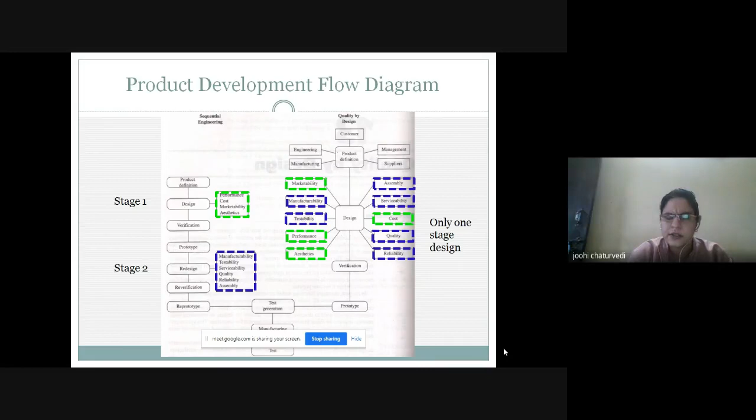If we look at a hypothetical product development timeline, quality by design saves time, because it does not devote any time to redesigning, re-verification, and re-prototyping, since all stakeholders are involved in designing at one go and ensure their requirements are fulfilled. So there's a complete mix of requirement fulfillment during quality by design, because cross-functional teams are there, and it saves time.

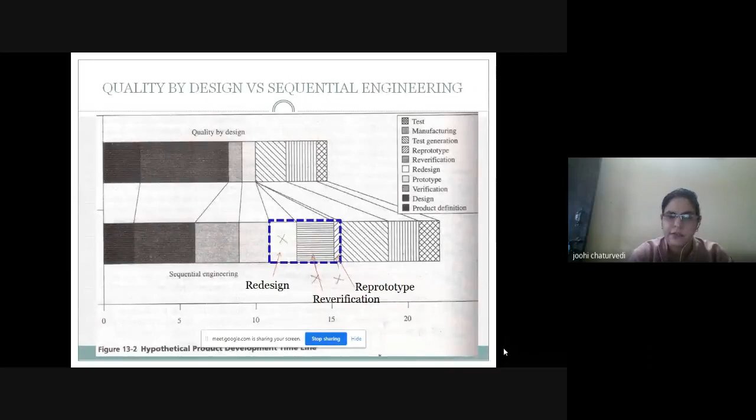The communication models are also different in sequential engineering versus quality by design. In sequential engineering, the production engineering and business team, the purchasing team, finance team, or purchasing quality, do not interact within themselves. But in quality by design, because it is a team effort, everyone interacts with each other as well as with the organization management.

Communication is very important, and everyone knows what kind of requirements the other department has, and they also show concern towards the requirements of other departments. But in sequential engineering, one person is more or less focused on his or her own work, and they are not that much involved in the work of other departments.

Now, if we talk about the tools used in quality by design, these are the various tools, and we are already aware of most of them, like total quality management philosophies. There were lectures also conducted on the same, on computer networks, local area networks, and global information networks for passing information from one place to another.

Then ISO 9000 9001 series, then the 14000 series of environmental management standards, then total productive maintenance. There are various types of maintenance, like preventive maintenance, which is time-based maintenance. Then reliability centered maintenance is also a modern concept, where the reliability of each and every part is considered and given importance.

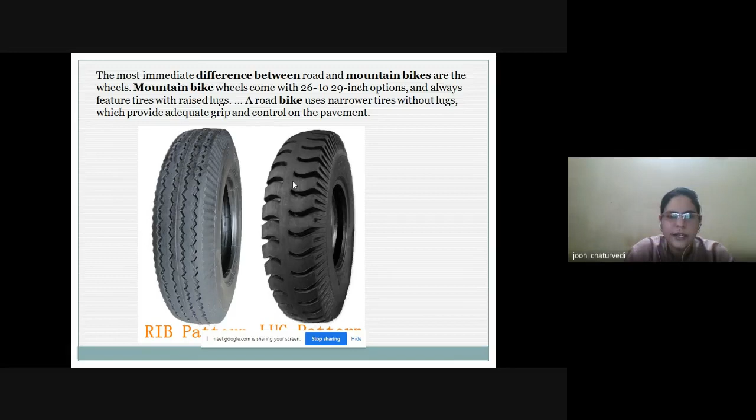Moving further towards the first step, listing the customer requirements. Here the primary requirements are that the performance and the aesthetics play a very important role with respect to the handlebar stem, and the aesthetics, the looks.

So deriving the secondary requirements from the primary requirements: reasonable cost, the aerodynamic look of the handlebar stem. It should have a nice finish. It should be corrosion resistant, and performance wise, it should have lightweight. It should have strength also, and durability also.

And in some cases, tertiary requirements can also be listed further. Primary requirements are not actionable by the engineering staff, so secondary requirements are listed in order to have more clarity.

Moving further, based on these primary requirements, the selection of material and the manufacturing process will be done. Selection of material and manufacturing process is important because if we select a poor material or process, then the component or product can stop functioning, or it may perform below the level of performance it is supposed to give. The component or product does not function properly or perform within required specification limits.

For example, in cars, if the specified mileage is 10 to 15 kilometers per liter, and it gives a lesser mileage, then that is a reduced performance as compared to what is promised with the customer.

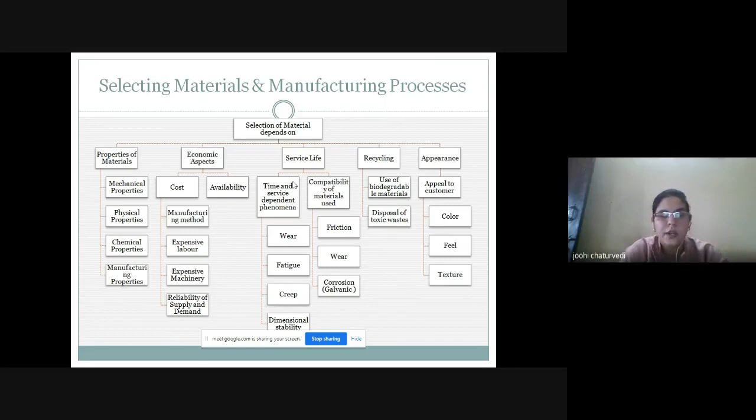Then friction, whether the parts are actually working well with friction, is important - for example, in tires, friction is a very important factor while designing the tire. The wear of the tire, the corrosion on reacting with various chemicals or with the environment, whether it is getting corroded or not - all these play a very important role in selecting the material.

Sequence-wise, mechanical properties should be considered first, then physical properties, then chemical properties, and fourth is the manufacturing properties.

Mechanical properties consist of strength, the resistance to deformation; toughness, which is resistance to failure; ductility, the ability to be drawn into wires; then hardness, which relates to one material getting scratched by another. If a hard material is there, then when rubbed with a material of lesser hardness, it will never show any scratch.

Then elasticity, fatigue, and creep. Fatigue is failure at a lower force when subjected to repetitive loadings, and creep is the slow permanent small deformation which happens in a material.

High strength-to-weight and stiffness-to-weight ratio of materials is also important. Strength and stiffness is the resistance to deformation the material shows, particularly for aerospace and automotive applications - for example, aluminum, titanium, and reinforced plastics. Properties should be appropriate to the conditions under which the product is expected to function.

It is important to find out the conditions under which the product will function. For example, in Antarctica where ice is present, the temperature will be very low, so material will be selected based on that. But for any vehicle that has to be serviced in India or elsewhere in the Asian continent, the functioning conditions will be different.

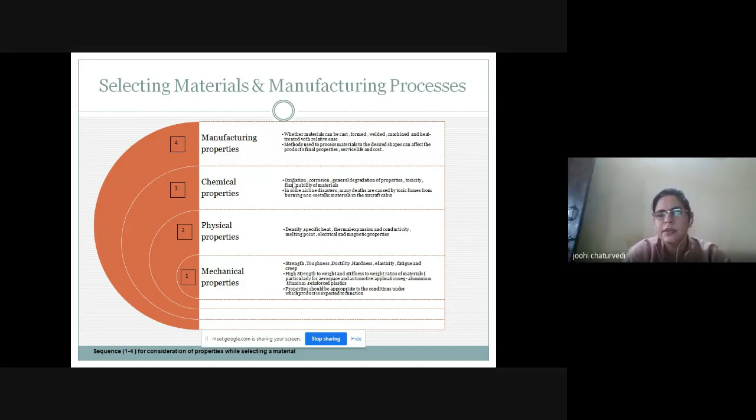Service life and cost also plays an important role in selection of materials. So the most important point here is that the sequence of properties selected should be mechanical, then physical, then chemical, and then manufacturing properties.

I hope up till now there is no problem in understanding.

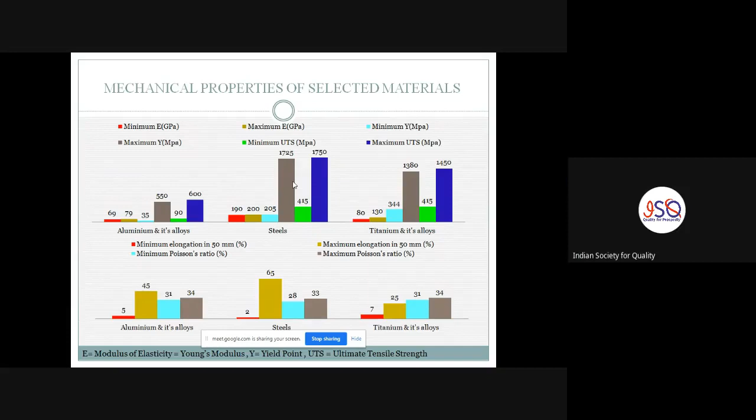Hello? Hello? Anyone has any questions? Okay, so far going good, no problem. Actually sir, we are not able to see the participants. Sometimes we feel whether they are able to hear or not, so in between it is necessary to ask.

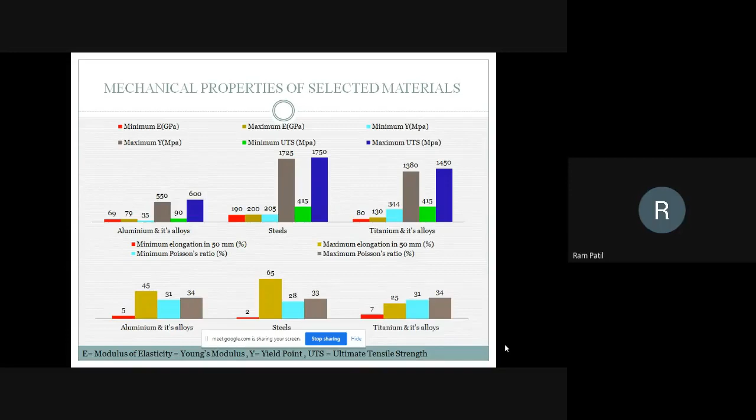Yes, so moving further, like one example, I have taken some mechanical and chemical properties, and some physical properties also. Now first we have to consider mechanical properties.

Now here, modulus of elasticity, that is Young's modulus, plays an important role. Yield point, which is denoted by Y. Modulus of elasticity is denoted by E, and UTS is ultimate tensile strength, or the strength at which the material breaks. So the tensile strength here, the minimum and the maximum, are shown for aluminum, steels, and titanium.

Minimum for titanium is 415 megapascal, and 1450 is the highest ultimate tensile strength. Then steels, the range is 415 to 1750, so steel is having the maximum range. Aluminum actually has a lower ultimate tensile strength, from 90 to 600.

So according to the robustness which we want to have, we can select the material. If we want to have a material having greater strength or greater tensile strength, then steels can be used, and moderate tensile strength, then titanium can be used, and lower tensile strength, then aluminum can be used.

So for the cycles or handlebars which are produced for kids, maybe aluminum may be used because it does not require that much strength. The weight of the kids is also very low.

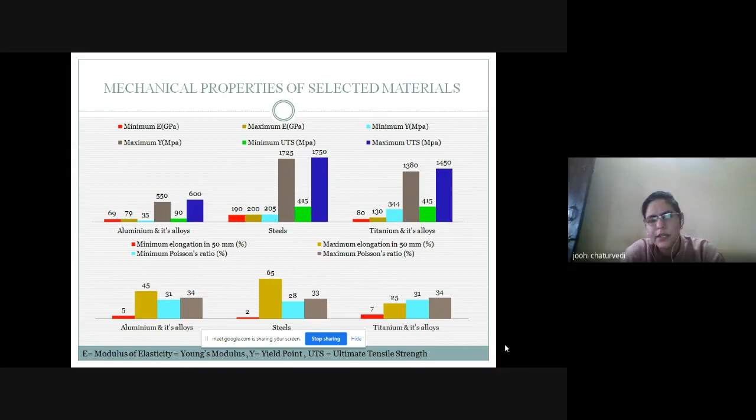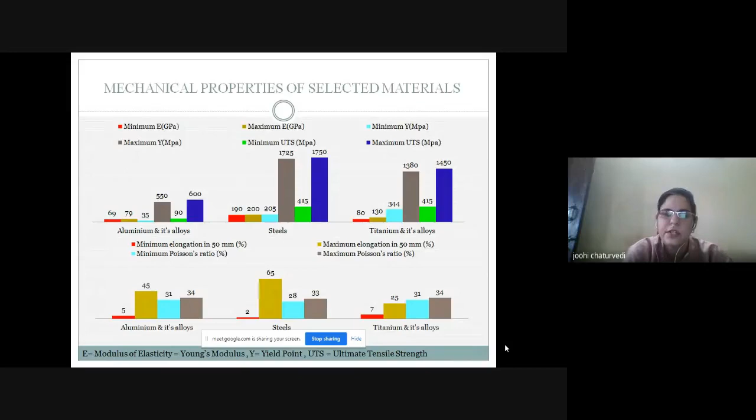Similarly, Poisson's ratio is basically the ratio of the length, the depth and the thickness of the material. Minimum Poisson ratio is 31 for aluminum, and maximum it is 34. Similarly, steels also show it as 28 and 33, and titanium 31 and 34. So all these properties can be considered for designing the materials.

Then physical properties can also be considered, like the density. The material density also plays an important role in the manufacturing process which is selected. A denser powder material actually helps in powder metallurgy, when powder metallurgy processes are performed.

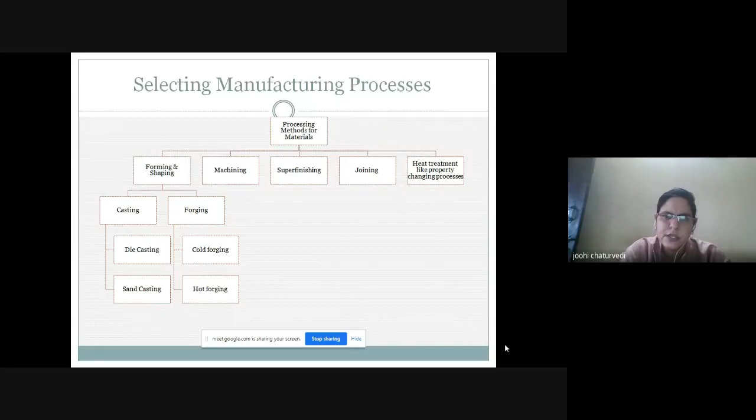So what are the important aspects of these? Powder metallurgy is for complex parts made of high strength and hard alloys. Casting is the oldest method, used for producing complicated shapes, and it is much cheaper as compared to powder metallurgy or forging.

Plastic deformation takes place when compressive forces are applied in case of forging, where the material is subjected to compressive forces and is deformed to the desired shape. Parts belonging to the net shape manufacturing category can be made with special techniques using forging, and with powder metallurgy, good dimensional accuracy, good surface finish, and strength can be obtained.

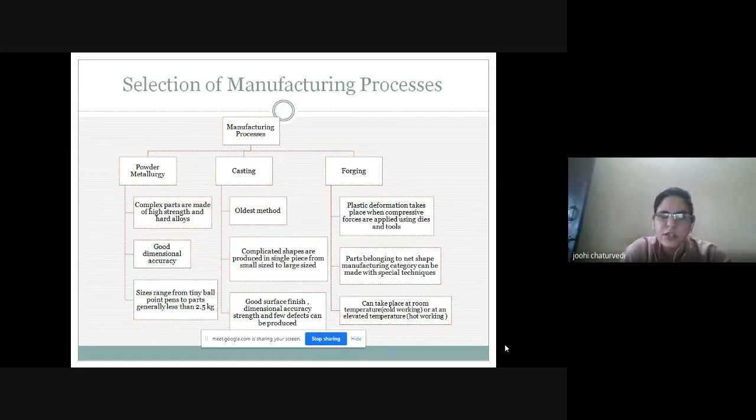But there are some defect possibilities also in case of casting. So all these 3 processes can be compared for their benefits and for the type of materials they can manufacture.

So here these relationships are emphasized. Steel is having a relationship with reasonable cost. Aluminum is also having a strong relationship with reasonable cost. And welding is the process which is a reasonable cost joining process.

Other joining processes are not given here; maybe other processes directly produce the net shape manufacturing products which do not need any further joining or other process. Also, aerodynamic look is best supported by die casting, followed by sand casting and forging, and powder metallurgy also supports aerodynamic look.

Then for nice finish, it is aluminum and titanium which give a nice finish, and die casting also supports this finish, as does powder metallurgy. Aluminum and titanium are better corrosion resistant as compared to steel.

For lightweight, aluminum and titanium have a lighter weight and have a strong relationship with that requirement. For strength, steel and titanium are able to deliver strength well, and forging also supports the strength obtained in the final component.

For durability, steel is most durable, and die casted products are more durable, as are forged products. Medium relationships are shown by the circle which is not filled, and the triangle shows a weak relationship.

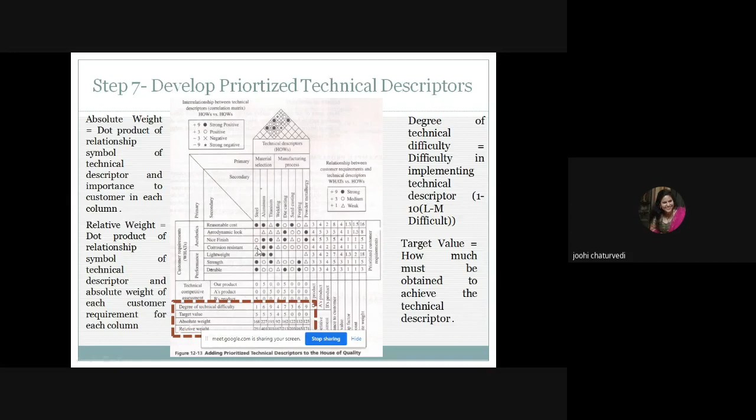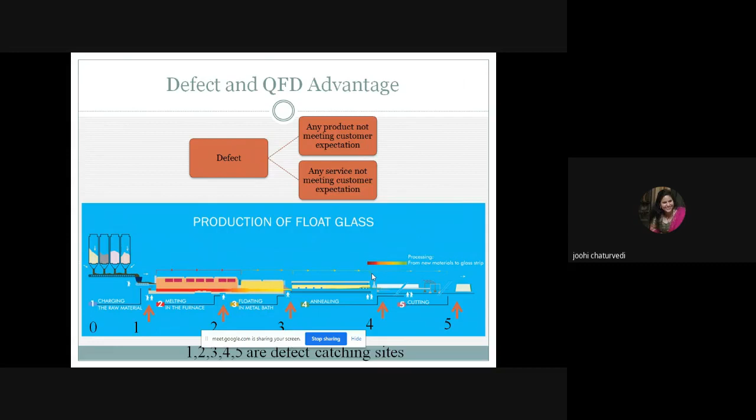Now defect, according to the books we have referred, is any product not meeting customer expectation, or any service not meeting customer expectation. If we compare, the origin of a defect can be at any of the stages, and defect catching can also be at any of the stages.

If the defect is caught closer to the origin of failure, there will be lesser cost in improving, repairing, or removing the defect. The closer the defect is caught to the origin of failure, the lesser will be the losses.

First of all, the defect should not happen, so we should have preventive measures so that the defect does not take place. But if the origin of the defect is at stage 0 and it is caught at stage 0, there will be lesser cost compared to when it is caught at stage 1, 2, 3, 4, or 5.

Similarly, if a defect is originated at stage 1 and caught at the same stage, there will be least cost. At stages 2, 3, 4, 5, there will be more cost because more value addition has taken place. After stage 3, the component is more expensive compared to the component at stage 2.

So the greater the defect cost, the closer it should be to the origin of failure in terms of detection. If we are designing detection mechanisms, they should be designed closer to the origin possibility, meaning the manufacturing process where the defect can be originated.

First of all, we should design processes so that defects do not originate at all, meaning preventive measures should be there. But in case any defect is occurring, the detection mechanisms should also be designed closer to the origin of failure so that cost can be reduced.